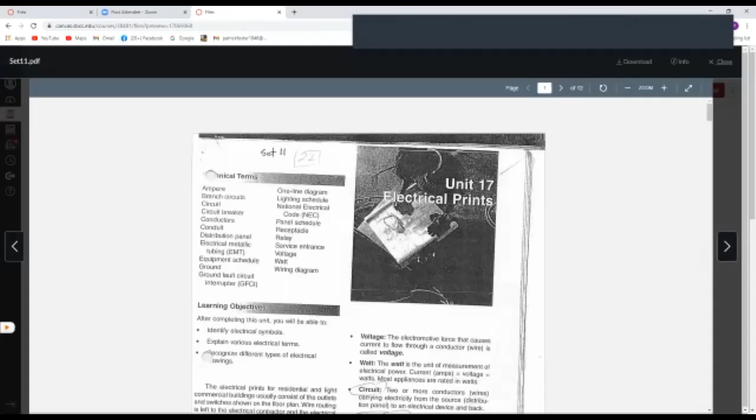This book that I'm taking these from likes to give everybody a little terminology, but you don't really need to know this that much if you're a carpenter, because if you're doing your own electrical... some contractors - let me put it this way - a contractor by law is able to do electrical and plumbing in their project if it's a residential project. Like Jim Cunningham, one of the other teachers, he does his own electrical and plumbing. So in that case, if you were a building contractor, you might want to know this stuff a little more than just a carpenter working for a company. But...

Electricity has a couple of terms in terms of its power. So you've probably heard of amperes and certain amp fuses. They use metaphors for electricity from water. So here you have the measurement of the current. Current's a term for water, right? You have a current running down a stream or in the ocean. So when they started understanding electricity, they had to find some kind of metaphor that would give people a picture of what was going on. The truth is there's no real good picture. It's kind of a mysterious phenomenon, but they've settled on current and water terms to help people.

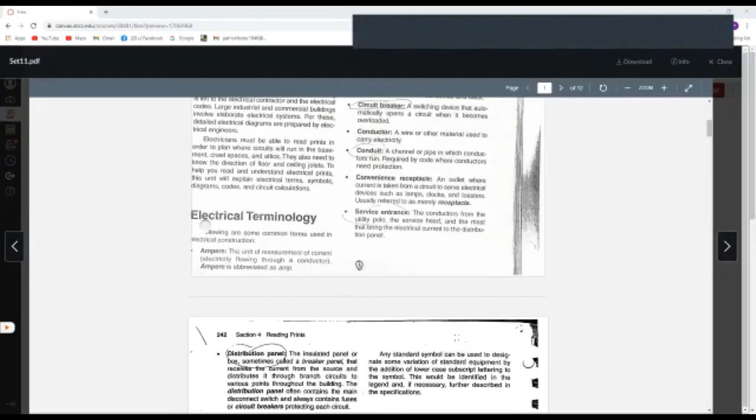Service entrance is where the utility from the power station nearest you comes down the utility poles to your house. Where it attaches to your house is called a service entrance. There's a service head, that little bent pipe that accepts it, and that brings it down to a distribution panel. We'll look at a picture of all that in a second.

Yes, question - a little bit blurry, just to let you know. Oh really? This second page is blurry too? It's a little clearer, but it's still slightly blurry. Huh, there you go. I mean it's pretty good, you can read it.

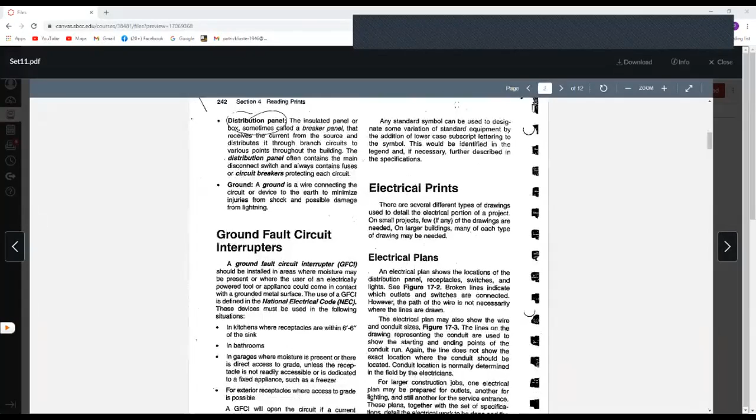Okay, okay. I'm not sure I can do anything about it, so I hope... that one's legible.

Okay, so for building, I'll name the things that are really useful for non-electricians to know. Ground fault circuit interrupters are a special type of outlet used where there's water. Bathrooms on the drain boards have to have them, kitchens on the countertops have to have them, anywhere water is likely to be splashed.

Here it tells where they're used mostly. If there's some kind of fault in the current, like if water gets in there, it provides a place for the current to go, not in its regular circuit, and that could be going toward you. You could short circuit that yourself with your finger if there was water nearby.

So when it starts to short circuit, it sends a message to its interrupter and it shuts off in 25 to 30 milliseconds. That's pretty fast, fast enough to keep you from getting electrocuted. It's really nice to have these in your kitchen, so if water gets splashed on it while you're toasting your bread, you won't get electrocuted. That's a great invention.

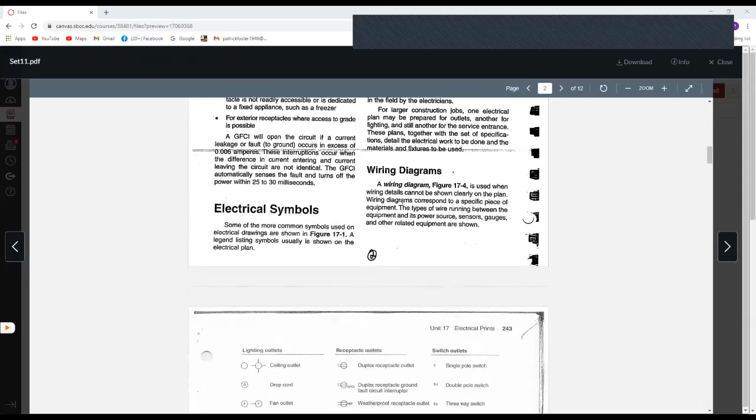Now if you short circuit a circuit in your kitchen countertop where the blender or toaster is, if you didn't have a ground fault circuit interrupter but a regular outlet and you splashed water on that, it would shut off at the panel. That particular circuit would shut off at the service panel, but it would take a lot longer to do that, so in that time you might get hurt. So they've put these circuit breakers not where all the circuits are in your panel, but in the actual place where they're being used, where water is.

Okay, now electrical symbols we'll look at in a second. There's a whole page of them.

So, electrical prints — we're talking about blueprints since that's what this class is about. There are several different types of drawings used to detail the electrical portion of a project. On small projects, few, if any, of the drawings are needed. Typically you'll just have stuff on your floor plan if it's a simple house.

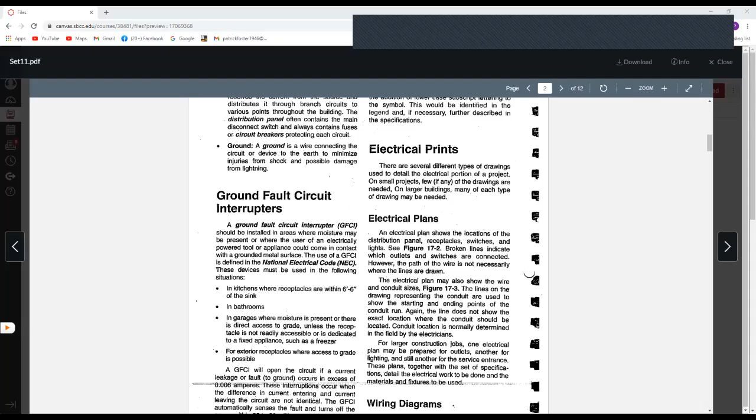If you're a wealthy person with a lot of strange electrical devices that are complicated and draw different kinds of electricity, you might need a separate plan. But in most middle class houses, there's not much more than a floor plan, and we'll show you that in a second.

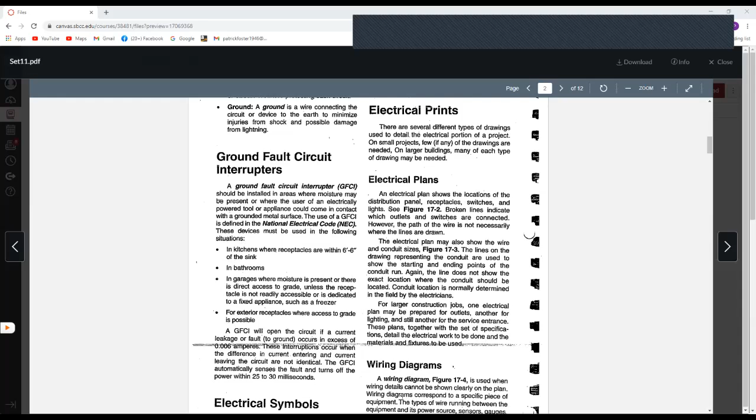So the main thing an electrical plan would show is the distribution panel — that's the box in your house where all the circuit breakers are listed. Receptacles, which are outlets; switches, which turn the outlets on; and light fixtures, sometimes fastened to the ceiling or wall.

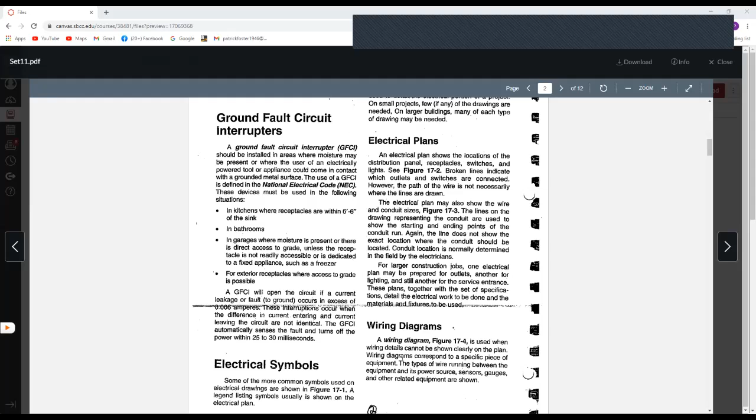And then they have broken lines that show how the switches are connected to the outlets and the lights. Those are the basics of an electrical plan, and you can get all of that on the floor plan — there's enough room, so unless it's super complicated, it'll just be the floor plan.

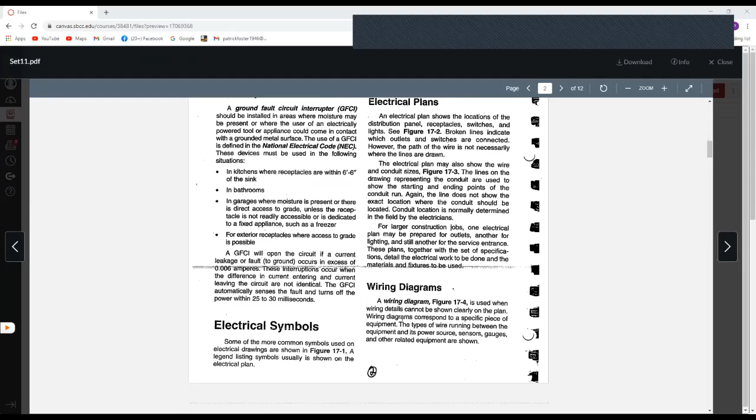Otherwise there might be an extra plan if there are complications. We'll look at the Laguna Blanca school blueprint later — they were redoing an arts building with lighting for drama and theater plus art studios, so there was a lot of lighting and outlets needed, and they had a special plan for it. But that's commercial or school construction.

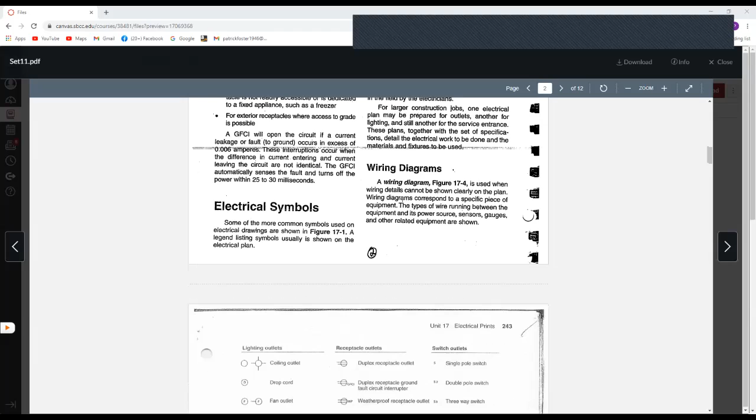Okay, so let's look at some of these wiring diagrams. They may do drawings if the wiring's complicated and you can't show it on a floor plan — there may be supplemental plans, so we'll look at some of those coming up.

So these are your basic symbols, and we'll look at how they're used on a floor plan in a second. Sometimes in the middle of the room — this is becoming less popular — they used to put a light in the center of a living room or dining room, and you could have a chandelier come down over your table, switched at whatever way you came into the room. But now they're doing a lot of things besides just that ceiling outlet.

There's a fan outlet symbol. Usually they have the letter that has to do with the symbol — F for fan, J for junction box.

Here's the lighting outlet. They call them outlets because you plug the fixture into the outlet, like you plug a device into a receptacle. The receptacles — duplex just means there's two, like you've seen in your house, one on top of the other, two outlet receptacles.

If it's a GFCI, like we just talked about, you have to write that next to it to distinguish it. If it's outside, it needs to be a weatherproof receptacle with a box to protect it from rain.

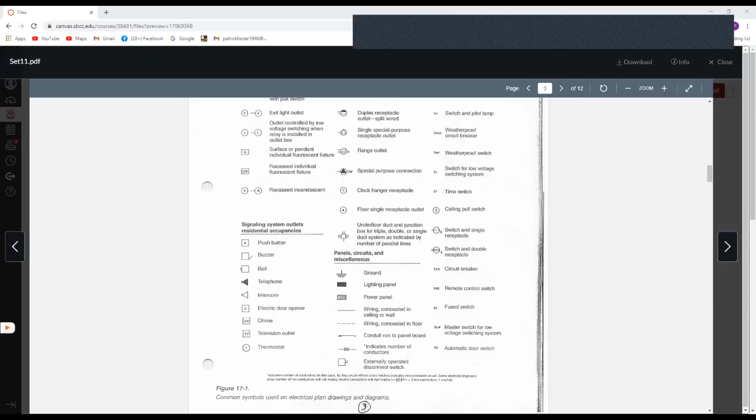This book that this came from was probably made 20, 30 years ago, and there's been a lot of new electrical gadgets, so there may be some differences and there may be new symbols for things.

Then there's switches, that's the third category. Single pole switch means there's just one switch in that little place. Sometimes there will be 2 switches above and below each other. A 3-way switch doesn't mean there's 3 switches on the switch itself, but it means there's another switch that operates with it. So if it's a room that you want to be able to shut things off from several directions, you would have a 3-way switch, or a 4-way would have 3 places to switch it off.

We'll look at those when we look at the floor plan. Those are the main ones, okay?

Now, I don't know why they have a television outlet. Well, maybe because it's dedicated outlet and they want a lot of power and they don't want anything else on it, so that may be why they put TV. But now TVs are getting more unique, so they may require other electrical demands. Although I got my first big screen TV a couple years ago, I was kind of late, and it required... you could just plug it right into a regular outlet. So I think they figured out how to make all these appliances pretty normal. I think that's for the coax cable, Patrick.

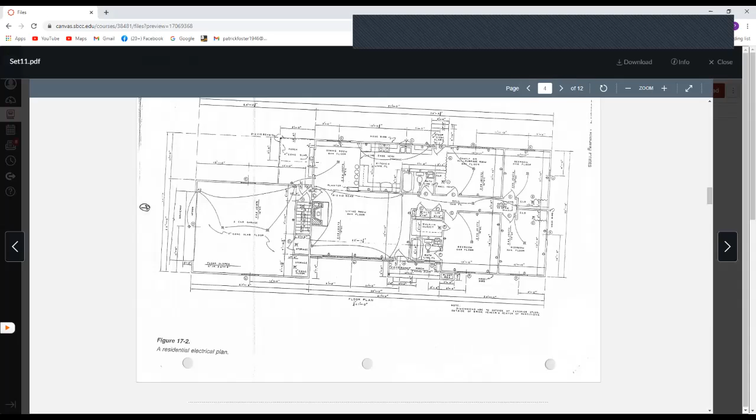Yeah, yeah. Is that big enough or more? Can you zoom in a little more, please? No, the plus stopped, it just stopped, I couldn't go anymore.

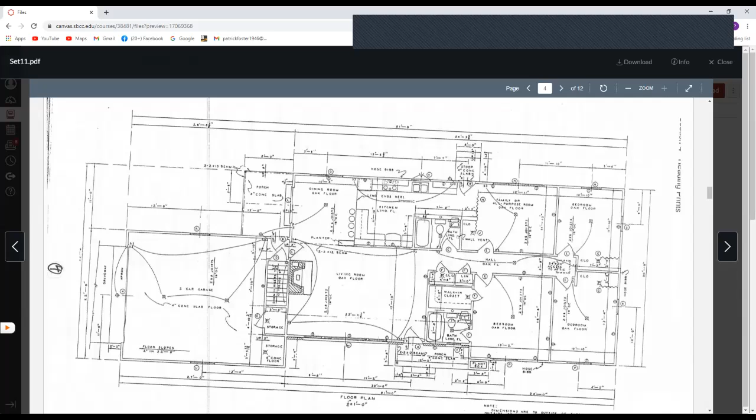So we've got some blueprints that we're going to look at that I think are clearer, and we'll look at this stuff again. But let's just show this.

There's something about this print—I had trouble with it too, and I read these things all the time. There's something not quite right about it, but anyway, let's find the front door. Where is that thing? Here's the garage. This must be the front door here. Yeah, here's a porch. So do you see where my arrow is?

Everybody? Yes. Okay, so you come in the door and your house is dark because you've been out to dinner and you shut the lights off. So here's the switch, you switch this and it switches on this outlet. This living room doesn't have a light in the middle of it. If you go up here for the all-purpose room and the dining room, they have lights on the ceiling. So sometimes the switch—here's a switch coming in from this.

You come into the living room and go into the dining room, and you can hit the dining room overhead light—the living room doesn't have one. So what they've done is switch one of these outlets, which probably has a table lamp on it. It shows this going to another switch by the dining room, so if you're coming from the kitchen wanting to go watch TV and have a drink in the living room and it's dark, you just walk over here and it's the same switch—it'll turn this light on.

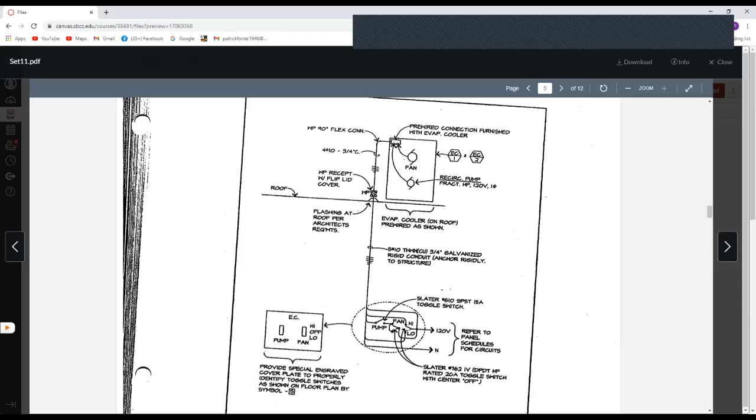So this is some kind of evaporative cooler, and it requires special wiring. They may do a whole page on this—it depends on whether they thought of it when designing the house or not. If the architect had it, he could put this on a detail page where other details are, with a whole page of electrical or HVAC details. Or if they asked the plumber to come up with one to put in the plans, it could just be a page stuck in there. So sometimes they need specialization there.

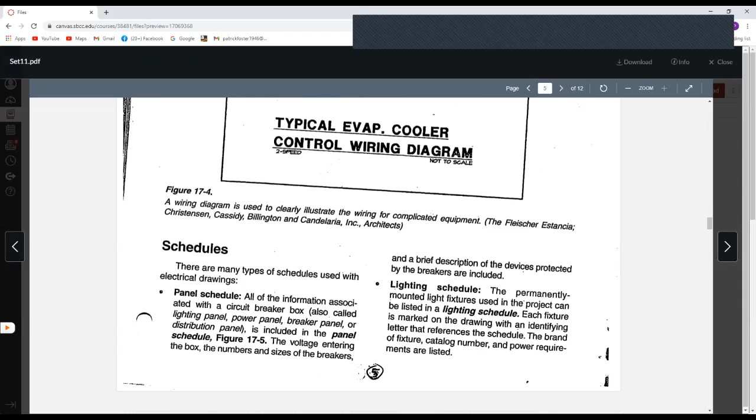So this is getting back—I might as well keep it zoomed up here so we can read it easier. These are all names for a circuit breaker box: a lighting panel, power panel, breaker panel, or distribution panel. Those are all alternate names.

It's basically—we'll show a picture of it—but you all have one in your house. It's just a big, about two foot across, two to two and a half foot high box with a bunch of circuit breakers in it. There used to be a box with fuses instead, the round fuses that you screw in. But every time a circuit overloaded and too much power went back to the fuse, the fuses were made so they had a little filament in them that would burn if the amperage was too high.

If you overloaded a circuit, it would burn the fuse out and you'd have to replace it. So you can imagine how tedious that was, and people would never have the right fuses on hand. They'd use them and forget to go get new ones.

So people would put pennies in the fuses. A penny will also span the circuit, the same place where the fuse breaks it. But what's wrong with just putting a penny where a fuse was? Fire hazard, yeah. The fuse's filament would break and shut off the current, but a penny would just keep heating up and allowing the current to go. So it basically bypassed it. It wasn't a safe thing.

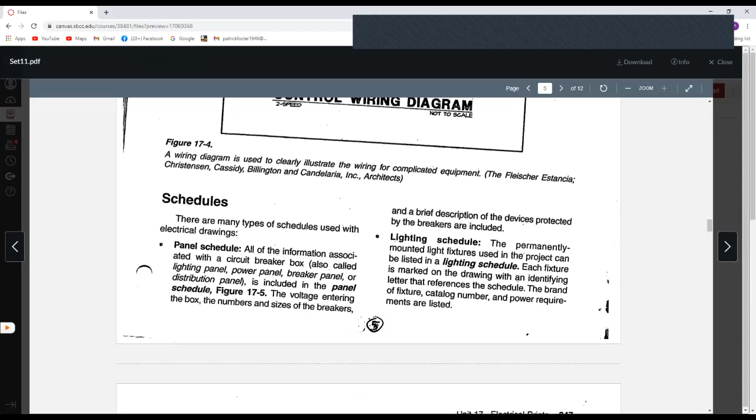Okay, lighting schedule. When you see the word 'schedule,' remember we talked about it in the beginning, that it's actually a list. Why they call it a schedule, I don't know, because schedule usually involves time, but this doesn't. This is just a list. So a lighting schedule is just like a door or window schedule. It lists all the fixtures, what they are, and if they take any extra power or anything like that.

There is one in here. So this is a sketch of a circuit breaker panel, a distribution panel. And what they do is look at this, you'll have rooms. Where are they?

Oh yeah, here we go. So living room, these are lighting and receptacles in the living room. That's this circuit. There's a second circuit for the garage and the kitchen, they're on one circuit. There's another circuit for the garage, which has hall lights. So they divide up all the needs of the house into circuits that go around and service the outlets and lights.

But the way they do it, partly it's convenience, so they'll take rooms that are next to each other, but it's also partly the amount of energy they need. So if you have a dryer, which takes a lot of energy when it starts up—washers used to take more energy than they do now—an electric range will take good energy too. Toasters take a lot of startup energy, even though they only go on for a minute.

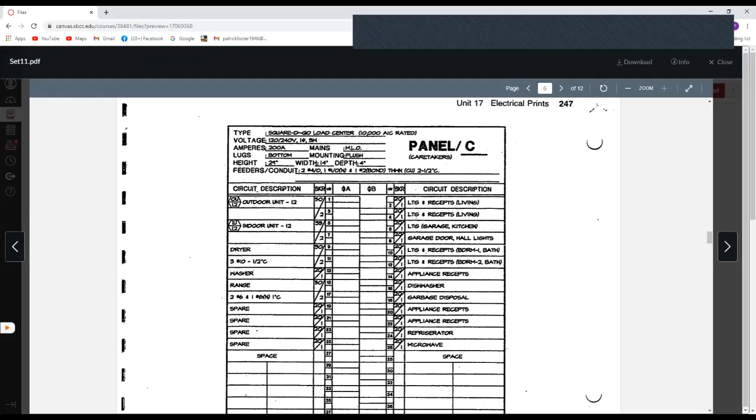Sometimes they'll put individual circuits, or they'll do a kitchen circuit with a couple of things like where a toaster or a microwave is going to be, and make those separate circuits so nothing competes. If you have a bunch of appliances on at the same time, it won't pop the circuit. So those are the kind of decisions that go into what's on the circuits, and where they are. See, what are these? Circuit descriptions.

Then they might have an equipment schedule, like a lighting schedule, but that's if you have equipment that has unusual power needs and wiring differences. Then they have a thing called a one-line diagram, which we'll look at in a second. It's just a way electrical circuits can be drawn.

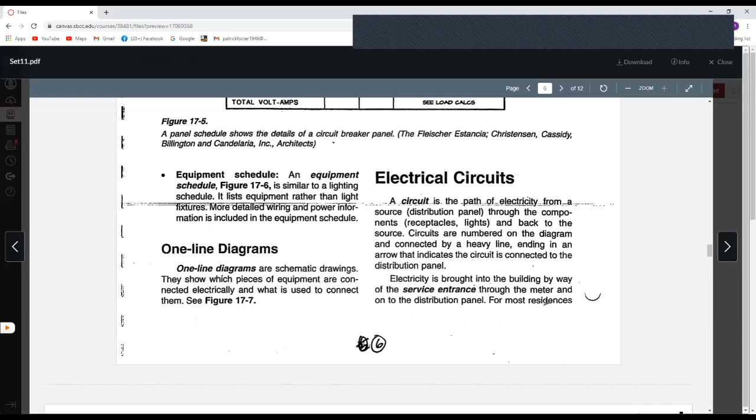Here again, it defines circuit as the path of electricity from a source. In most of our cases, it's from the utility company, unless we're running on solar, which more and more of us are. We may still have a panel to feed the electricity back into and use at night, or we may have batteries and be totally off the grid. So they go through the components, the outlets and the lights, and then they come back to the source.

So here's a one-line diagram, which means there's no depth to it. They don't draw thickness or depth of things, just lines that show the way electricity moves. I can't even tell you what this is of, what kind of building or room this is. Anyway, that's what they look like.

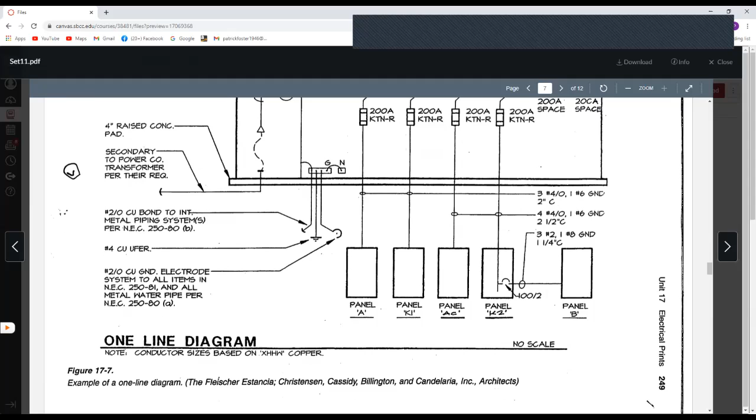And this is a section, right? Is it like a section or elevation? No, I think it's a plan. It says... even though I saw the 4-inch raised concrete pad, so yeah, that's a section, and these are vertical too because they're panels. But I think the wiring isn't necessarily oriented that way, they're just connecting devices with wires, so the orientation in the room isn't important. That's what one-line means. They can draw them different ways, whatever is easiest to identify. You don't want to draw a panel on its end because you'd have this little thin line, it would be stupid, but with everything else you can do that. Good question though.

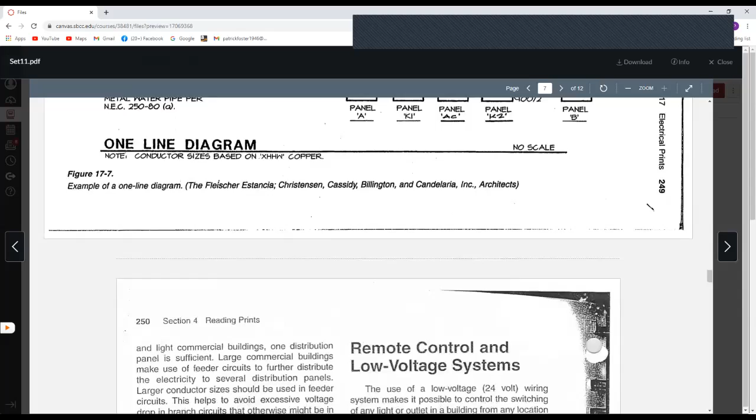Let's see. So here, branch circuits are the various circuits you have. General lighting circuits are used primarily for lighting and outlets servicing small things like clocks, radios, and TV sets. So your house will have circuits for these. Then they'll have kitchen appliances, which take more energy, so they'll have a different circuit, maybe several circuits. I think they want microwaves on a single designated circuit without sharing with other things.

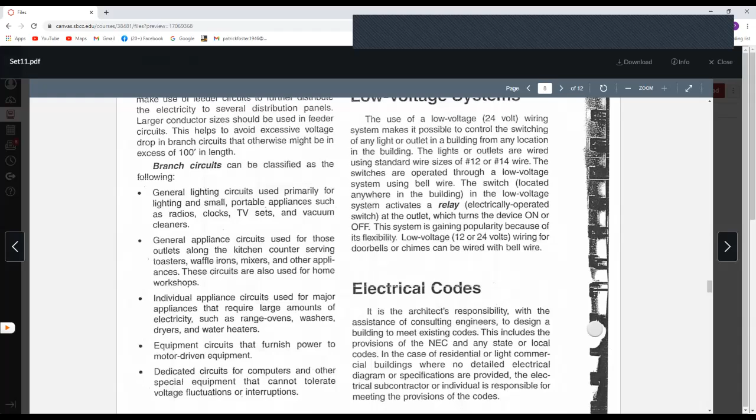But a lot of these like toasters and waffle irons and mixers can share a circuit. The thing is, they have to figure out how the average person is going to use the house. If you're wealthy and designing the house to the way you live, you could say you have parties in the morning, cooking waffles and serving toast and mixing drinks or smoothies, and they could all be on at the same time. So they'd say we'll need a couple of separate circuits so we don't overload it. But most of the time they figure people will use maybe a couple of these at most, so they'll load them up a little more densely on the circuit.

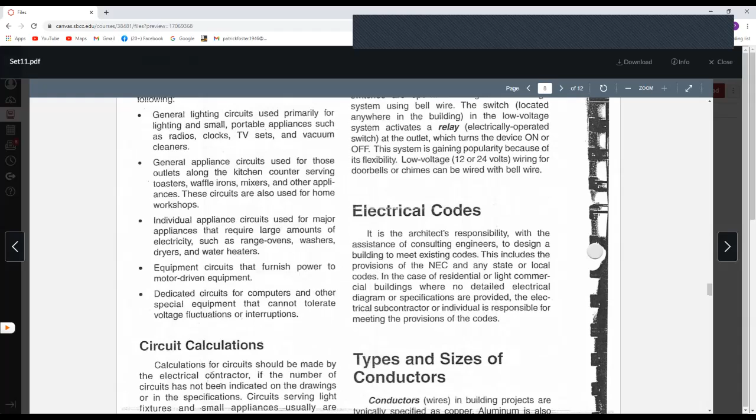Here's individual appliance circuits. So sometimes ovens, washers, even refrigerators have just their own single designated circuit.

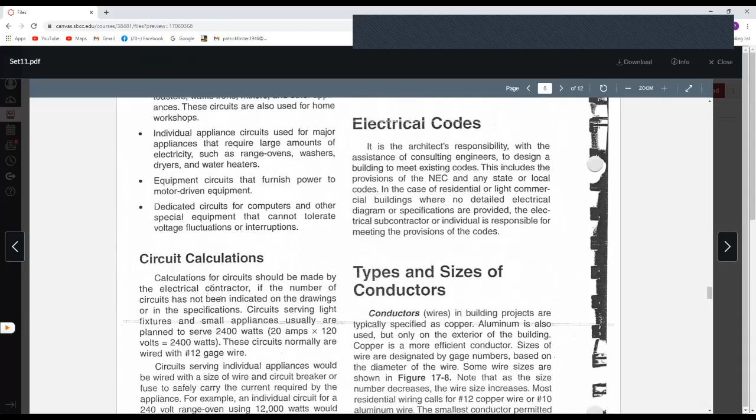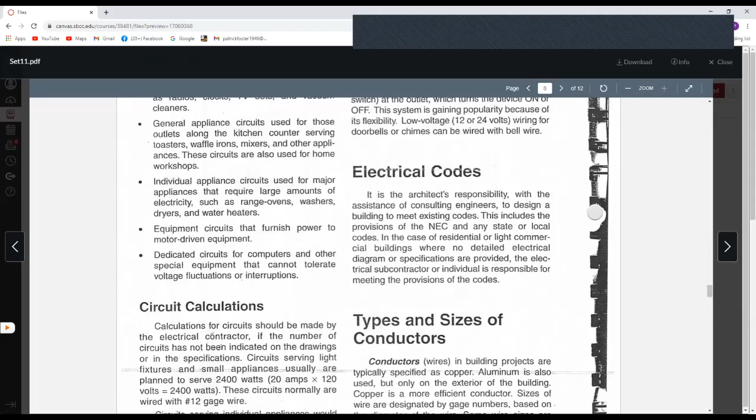Calculations, we don't have to look at that, electricians do all that. There's a national electric code. The architect and his designers, his engineers, have to make sure everything's going according to this national electric code. I'm not sure how strong it is. Somewhere I read that this was a suggestive code—it suggests you go along with this. But I think state and local codes are pretty fixed, they're going to be at least as strong as this national code, or stronger.

Okay, conductor wire sizes, we don't need to know too much about that. That page didn't have much. Here's another set of plans, this is from another book. That's a mess, isn't it?

So on a floor plan, we'll look at floor plans in a minute. They often don't connect the outlets to the switch. In other words, this shows all the circuits and labels them. Here's the first circuit, and then there's a circuit schedule. So circuit 1 has bedroom 1 and 2 on it. Say the power comes in at the switch here, then it goes to this outlet and to the overhead light, and it goes to these outlets, through the wall to this outlet, back to the light and back to this switch, or vice versa.

And then these switches have to be connected to the main panel some way. They don't show in the wall where these go, and usually they don't show the connection of the outlets. This is actually defining the circuit, so all the electrician has to do is make sure these are in the wall instead of out here. But this tells where they would go. Usually they just put the switch going to a light and going to an outlet if the switch powers that outlet. Otherwise the outlets are just freestanding with no connection, and the electrician comes in and knows how to do this.

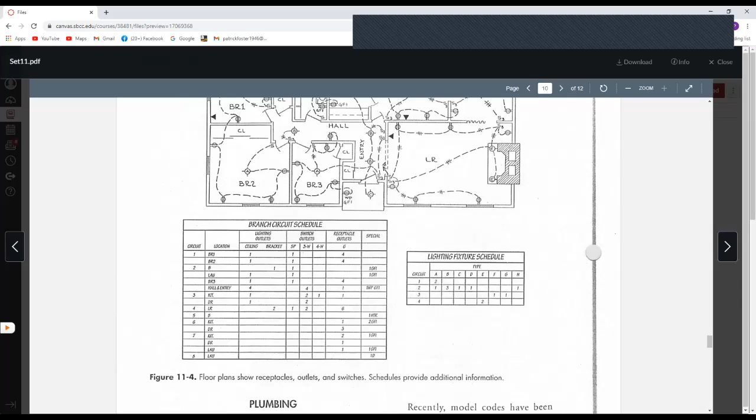They don't fill out the schedule more, but that's what it would look like. And then you'd explain what each of them are - A would be this type of lamp, B would be this type of lamp, etc.

Patrick, I got a question. So for those two bedrooms, there's a switch that controls - if you're walking in bedroom one and you flip that switch on, that's going to control all the outlets and the light?

If they had a part dark, like we saw in the symbol, if one side of the circle was filled in dark, that would mean the switch actually controls the outlet - made it live, and you could have a desk lamp there that would light up when you turn on the switch. But because they're all connected, that's one, like you have that on one breaker, for example.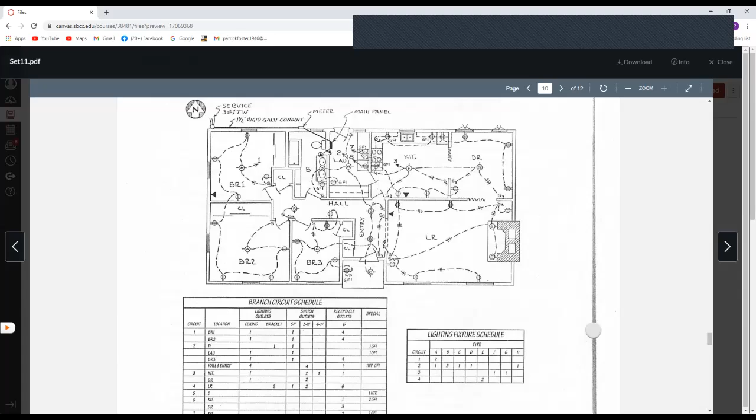Yes, it's probably - well, they say circuit one, so that would be a single breaker. Yeah, each of these eight circuits would be a breaker. Okay, that answers my question.

Yeah, so this shows you a little bit more. But like I said, the difference between this and the last one, and the floor plans we're going to look at, is usually they don't connect the outlets - they don't actually put the circuits themselves in.

And let the electrician figure it out, right? Yeah, they know what to do. They go right to it.

What they do want is to put the switch and light, because the client will look at the plans and say, okay, that's good, that's where I want it. Sometimes they'll put a switch on the wrong side of the door, and the client will say, hey, I can't turn this on because the door's in the way. So then they change it - part of it is information for the client to make sure it's the way they want it.

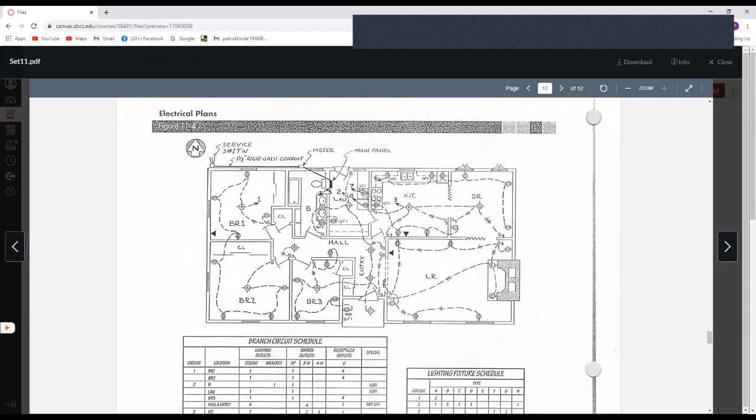So this is usually not here, the actual circuit connections, at least in my experience. Maybe some people do it. So let's see, anything else?

Oh yeah, okay, so here's - I don't know what kind of drawing this is. It's probably computer generated, because no one in the right mind would try to draw this freehand. Look at it, I mean, it's a mess.

But this shows the circuits also. Here's where they come into the house, and then it goes here, and one circuit goes to here, and then electricity goes this way - this must be a porch light or something - goes over through a joist system in that ceiling or floor of the next room, goes to here.

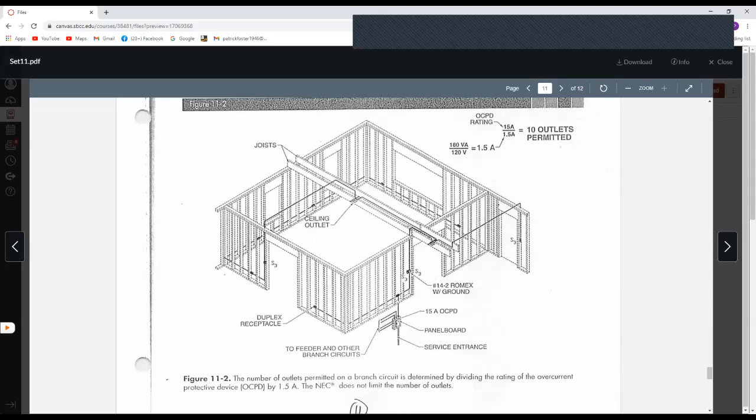Oh yeah, it goes over to here, and also goes across the house this way, and comes down and around and over to there and there to there to there. So that just shows you how they all connect, and here's a formula for how many outlets you can have, but this class is not learning how to design how many outlets you can put in.

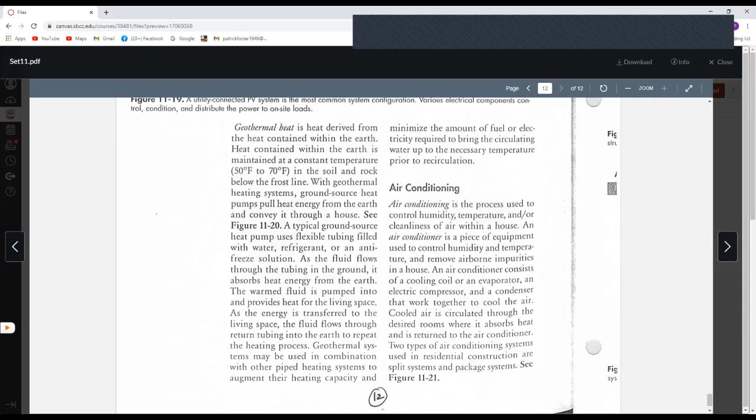So the geothermal hasn't taken off. It's mostly in the country where people have a lot of land around their homes. But it's a great thing because if you guys know what heat pumps are... No. Well, it's like air conditioning. Air conditioning, the kind we have now, it draws heat.

It draws heat from the air, and that heat they use, or it'll draw cool from the air, either one. They run them as both heaters and air conditioners. Instead of heating up something with electricity or gas, they take the heat that's in the air. If it's a warm day, they can take that heat and reverse it to get cold from it for air conditioning, or vice versa in the winter for heating.

So heat pumps work off the heat pumps you can buy at Home Depot, they work off the air. They're air drawn heat pumps. The difference in the air outside and what you want inside, seasonally, they can capture that difference in heat, which is really ingenious. It took physics a long time to get to that point, but it's a really great system.

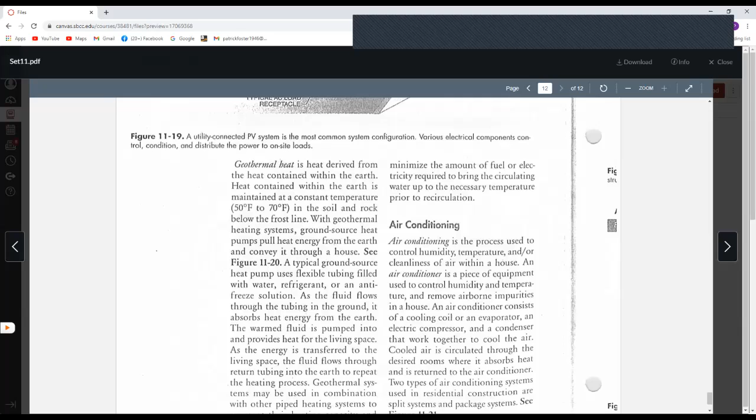The geothermal heat pumps go into the ground because under 5 feet, the ground's between 50 and 70 degrees all year round. 50 degrees is a height - if you're in a 50-degree house, it's cool, you're a little chilly, but you're not gonna freeze to death, because it's got to go down to 40 and 30 to freeze. But the amount of heat you can get from 50 or 60 degrees is incredible. So these pipes go down into the ground and retrieve that heat and use it for heating.

So we've got a lot of geothermal. Let's see, I guess I don't have a picture. This is the end of the road on this one. Somewhere else I'll have a picture.

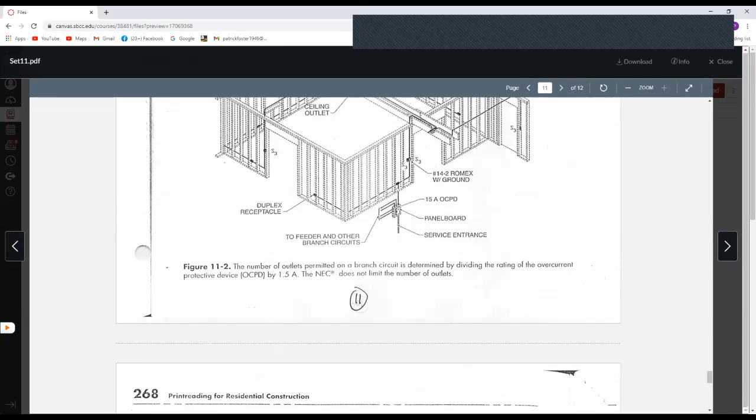So, God, how did an hour go by? Time flies. So, do you want to take a break or do you want to try to get through this?

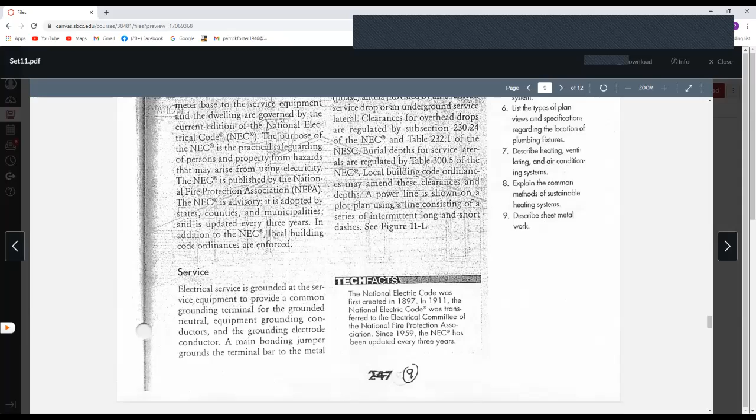You can also read this on your own if you're interested. You may have an interest in these particular trades.

Yeah, I mean it tells what stage. This is good for a carpenter to know because you have to work around the plumber. They didn't mention it in the electrical chapter, which is also from the same book. It's funny, but you have to work with them because they're drilling holes in your studs, so they can't do it after you put the sheetrock up. So you've got to figure out a timing, so you don't have the sheetrockers come in until the plumbers and the electricians are done filling up your walls with their stuff.

Also, they will often damage some of your structural integrity because they don't know. Sometimes they'll drill in the wrong places, or this or that, so you have to kind of work together to make sure the house stays where it needs to be.

So they have a rough in, and that's just, obviously, the utilities have to be brought to the house, to the site. And if you're going to do a slab, you have to have them come up through the slab where they're going to be coming up through walls. So you might have gas lines - well, not for much longer - but gas lines, water lines, drain lines, and electrical lines. If they're underground, a lot of electrical's from poles. So that has to come in, then they pour the slab around that, over that. And then all that work's got to be done ahead of time. And then after that, you come in when the walls are up and you can finish putting your plumbing pipes to where they need to go.

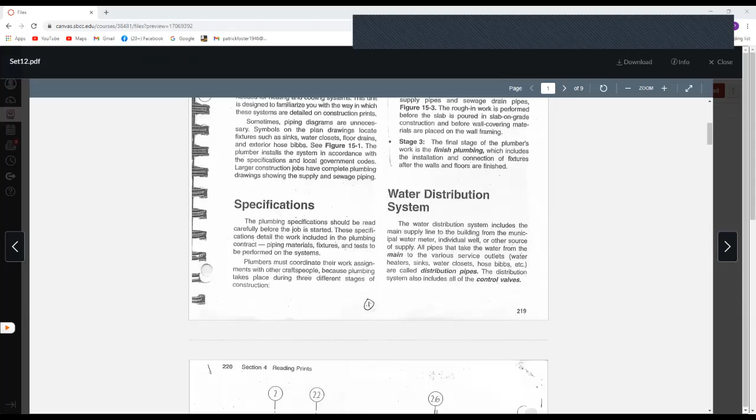Let's see what this says. So here's a floor plan. This is a commercial floor plan, as you can tell from all these bathrooms. And in the plumbing floor plans, it's the same as the electrical - they don't put where the pipes and the walls go, or where you're going to have a main plumbing pipe that's going to branch off. They don't do that on the floor plan, they just put the fixtures, the toilets, the sinks, etc.

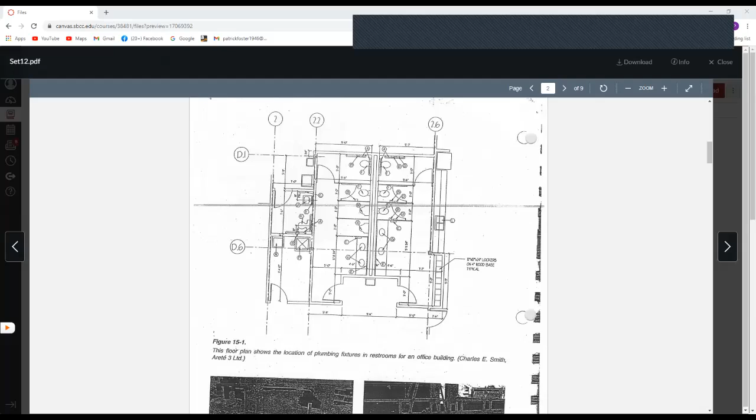And these pictures you can't see, so we don't have to cover them. Then the other thing with plumbing, one of the things is the materials of the pipes, what the pipes are made out of.

Copper's been the water distribution pipe of choice because it's easy to work with. You can sweat the joints, and it stays real clean, and the water flows through it pretty well. But we're running out of copper, and we use copper for electronics quite a bit still, right? It's the best conductor for electricity, so we use it in solid state and computer stuff, as well as all the Romex and most of the electrical lines, copper.

So it's kind of good that we started PEX, which is a plastic pipe for plumbing. It's a plastic pipe that isn't toxic. So we had to come up with polyethylene, which is the least toxic of the plastic pipes, and it's fine to drink water from it, and it bends.

PEX is more flexible than most plumbing pipes, so it's really starting to take over copper. Copper is also becoming more expensive as it gets more scarce, so people still like to use it - it's been the piping of choice over the years, but I think it's probably slowly on its way out. They used to use steel pipe, galvanized so it wouldn't rust. In old houses you'll see some of that, but it's not used a lot anymore, maybe commercially - I don't know a lot about commercial plumbing.

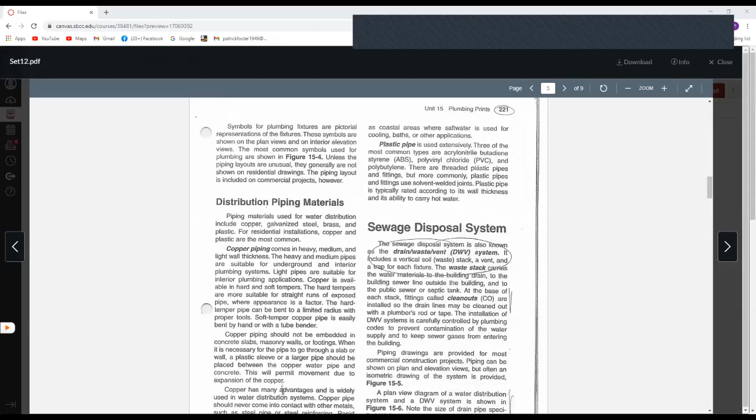Neither ABS nor PVC are allowable for water distribution now because they slough off toxins, and they don't want people drinking out of those. So you cannot use those for supply, but you can use them for drain because who cares what the drain water has. You can use PEX plastic pipe, and there's possibly polybutylene - one white plastic pipe that's still okay to use, but it's not PVC for sure, and it's not ABS. But people just start using PEX or stay with copper.

The drain system is sometimes called DWV - drain, waste, vent - because the drains drain waste and also need a vent as part of the system. So we'll look at that. You can call it a disposal system or a DWV system - that's kind of the traditional term.

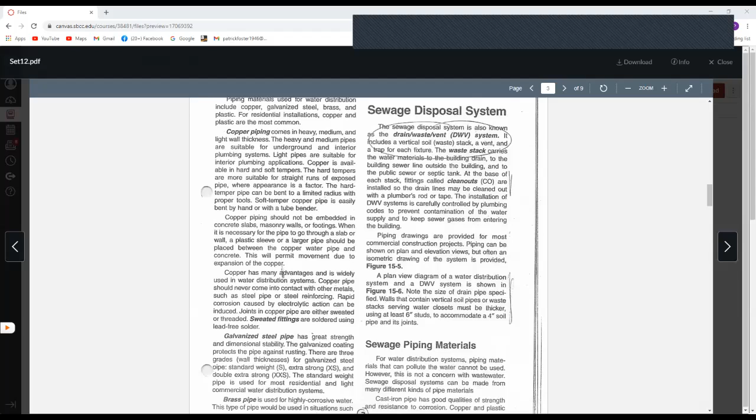In the plumbing system you need cleanouts, and probably you've never seen those unless you're involved with plumbing. They're little Ys that come off plumbing systems where you can stick a snake in and get to some areas. But people cover those up - I've seen them in apartment buildings covered up with sheetrock or in a place you can't get to. So in America, buildings are often torn down before things get so bad that you'd need to use a cleanout. But they're required - we'll look at where they go, and look at a diagram of where they're going to be.

One more thing before we move on - the drain pipes in a bathroom. You've got solid waste going down those pipes and a lot of sink and bathtub waste, so they have to be big, especially for the solid waste. You can't do a 2x4 wall behind a toilet - it's not thick enough. You could use two 2x4 walls, but not a single piece, because the pipes are often 4 inches, and a 2x4 is only 3.5 inches, so it's not even big enough. A 2x6 is 5.5 inches, leaving 3/4 inch on each side which allows for joints and stuff - so you usually have to have a 2x6 wall behind a toilet.

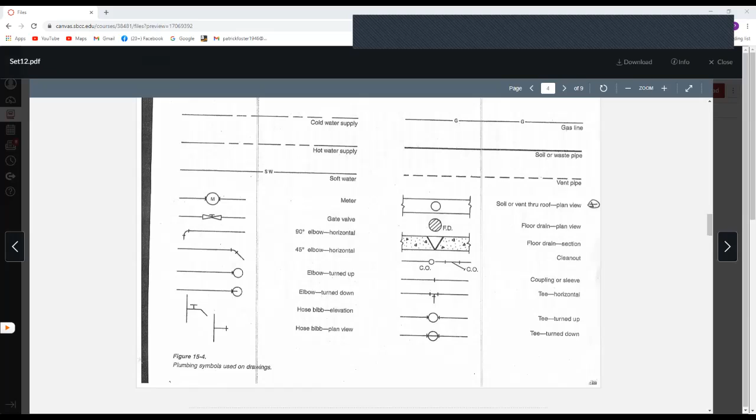These are symbols, but I won't hold you on any of these because we don't really use them that much.

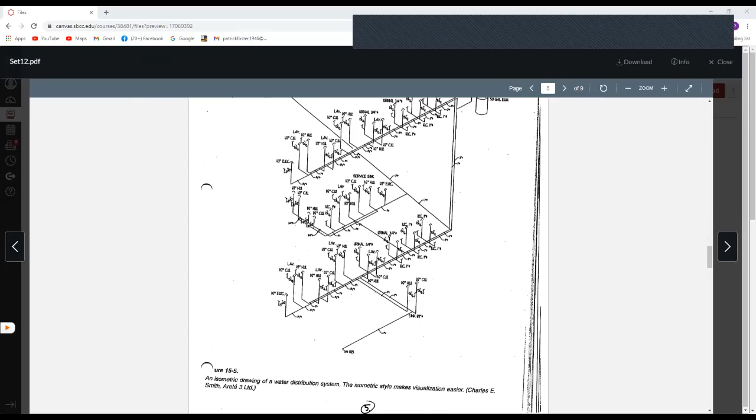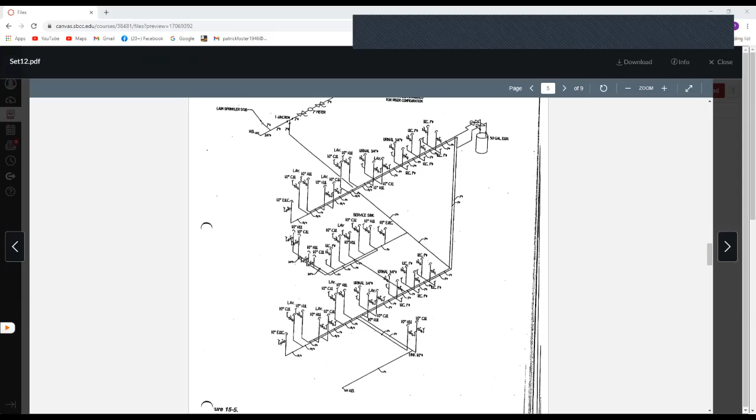This is a type of drawing, almost always for a commercial building where they have a bunch of sinks, toilets, and urinals lined up. It's called isometric because it's at that 30-60 degree angle and vertical, and it helps you visualize where they're arranged with each other. I don't find it that easy, though it's easier than some other types of drawings. The alternative is maybe a plan view from above, which would really be hell with multiple stories - a plan view is kind of useless. And an elevation would be useless because everything would be behind everything else. So where things are lined up together, you kind of have to have this kind of drawing to show where they fall. But again, as a carpenter, you won't need to use this kind of drawing - just the plumbers would use them.

And then here's some pictures of plumbing systems - they show a hot water tank, and the piping that goes to the various uses of hot water.

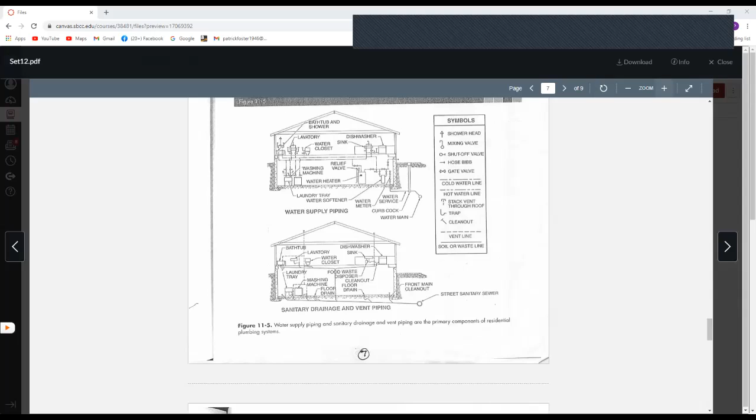It'll have the drain from the bathtub. Notice the little curve underneath all these fixtures. That's a trap, right?

Some of you heard the name trap, like a P-trap, or there are different kinds of traps. But every fixture that drains something has to have one of those.

Does anybody know why? To catch heavier things, or to keep sewer gas from coming up. Well, that first answer, to catch things, isn't its intended use, but it's turned out to be one of its uses. If your wife drops her diamond ring down there, often it'll settle in there and you can just take it apart and get it.

So that's true, but it's intended to keep the gas from rising. All these pipes are slanted down so the water drains, and the gas comes up on the same slant. When it gets here it'll go laterally, and there's usually water in this trap because as water pushes itself through until it gets to the end, a little bit sits in that trap. That little bit of water keeps the gas from coming up into your sink and into your bathroom or kitchen.

And if you didn't have that trap, you'd know the smell. You'd get a sewer smell all the time. So these traps are mandatory.

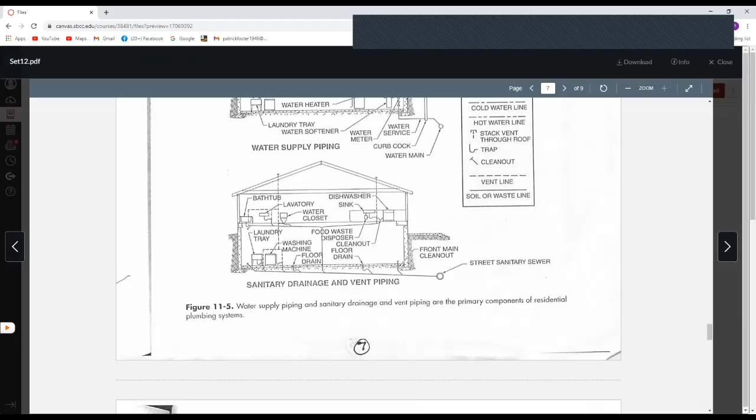Everything connects from one story to the next. It goes down to what's called a lateral in your yard, then connects to the street sewer system. Sometimes this pipe is clay, sometimes steel. Sometimes tree roots get down and break this pipe, so you might have to have some excavation and have a person come in and replace that. That happens occasionally.

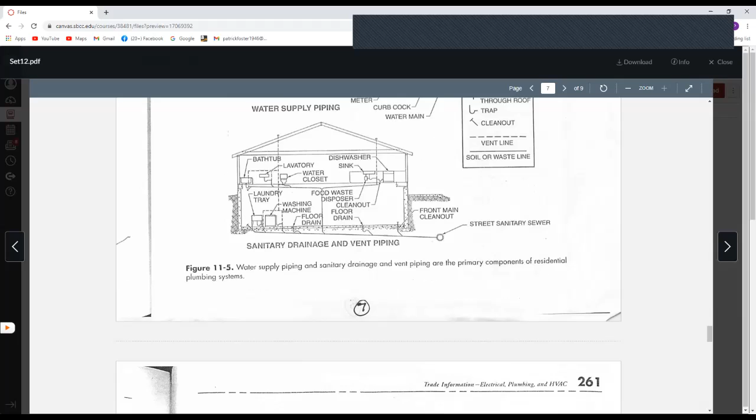But usually houses are pretty simple. They don't need to do that.

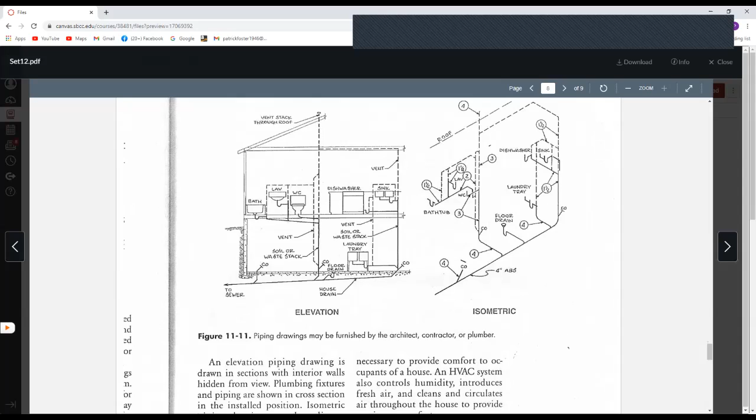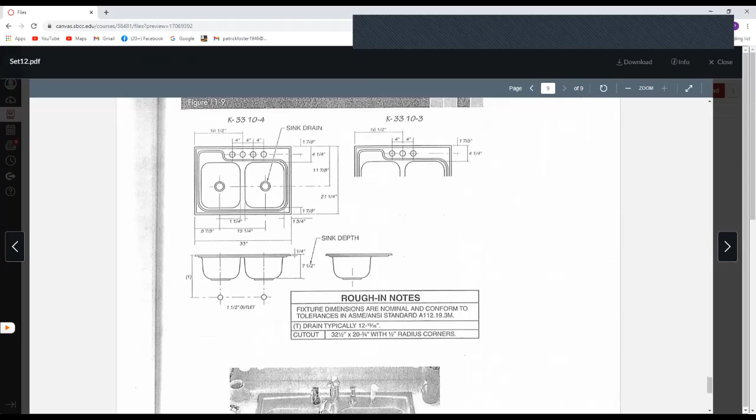Also, if you're putting in a granite countertop, the granite people would need to know this too, because they have to make holes for your fixtures. Okay, well, that was easy.

I'll show you a PEX system when I get a picture of one. Have any of you worked with that? No, I don't think so.

Okay, great. They're red and blue plastic, very flexible, and they come off of what's it called... they're all put together like a manifold. They come in a roll, but they're put together in a manifold, and it's really an ingenious system. I think it's the wave of the future because with copper you have to sweat elbows to make turns.

So it's a lot of work, and copper can leak. With PEX, it just bends, so you can bend everything and eliminate all that work. It's really a great system. You need a few special tools to work with it. Maybe I'll get those, but the reason I don't have them is it's not really a blueprint issue, but some of you might be interested in it.

Let's see, what time is it? Oh, we got a little time. Let's see what the HVAC says.

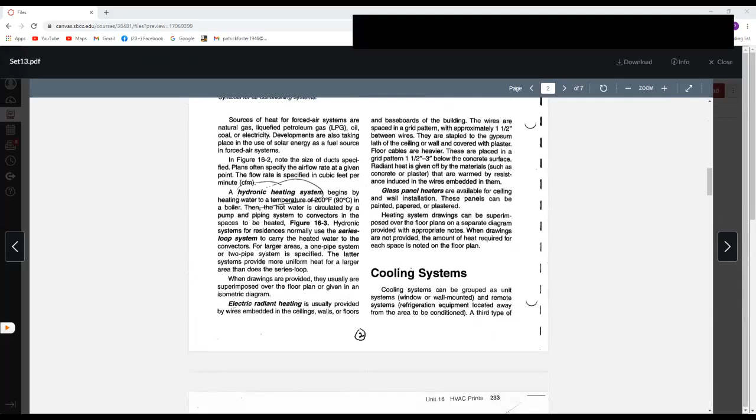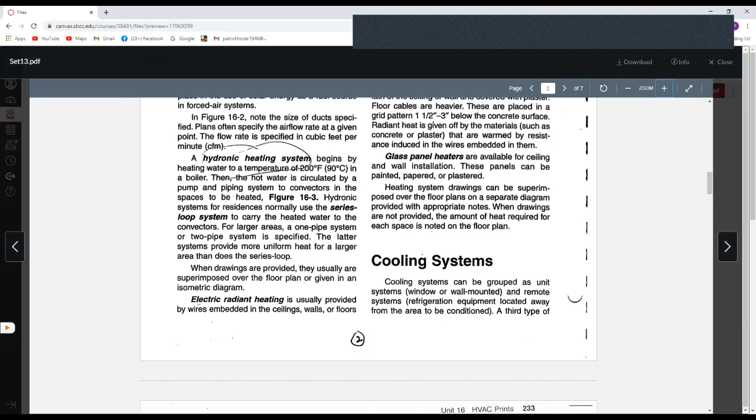So here's, do you see the middle here, hydronic heating system? Yeah, so that's what we're talking about. Like in Maine, I had one house I lived in that I remodeled, but it had a boiler in the basement, and that boiler I would connect copper pipe to, and run those copper pipes along the bottom of each wall on the room side. They have these covers so you can't see the pipe, and it's got fins in it, and then it's got this nice cover, and it goes all around the baseboards in your rooms, and just radiates the heat from the hot water. So it's radiant heat, which is nicer than convective heat, and it's real simple. It's a great thing. We just don't do it here, it's not cold enough. They may do it up Northern California or up the coast, I don't know. But that's what that is, hydronic. And then of course they have electric radiant heating that they put under the floors and things, but then that's no longer a plumbing issue, unless they use hot water, but now they're just using wires, I think.

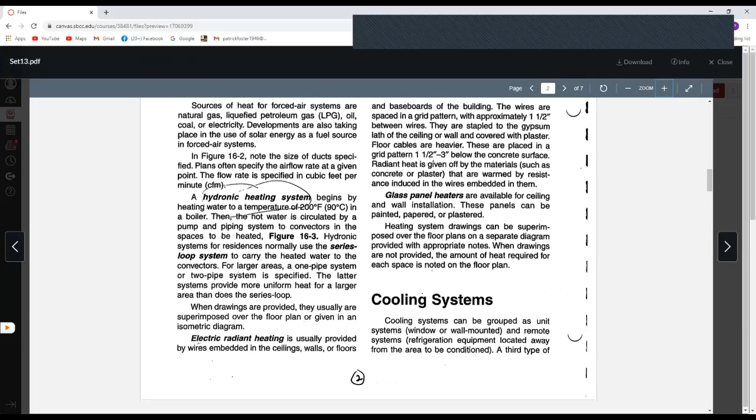Anybody seen... yeah, here it says, they can use wires, or they did use pipes of water under the floor.

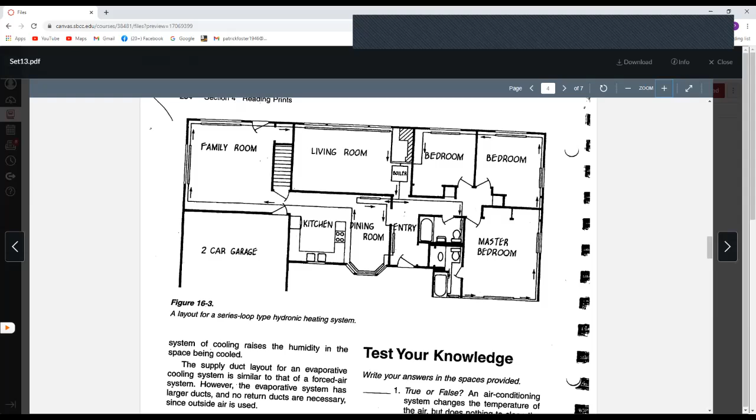Let's go down to, oh here's the radiant heating, a layout for a series loop hydronic heating system. So I don't know where the boiler... oh, here's the boiler. So the boiler just pumps it, and it goes along all the baseboards in the house. Kitchen, you don't need it, it just goes down the center of the room, and then along the edge of the inside of the wall. You've got to go through the walls, and it goes this way and back to the boiler. So this has like two systems, it goes through the bathrooms, through the bedroom, and back to the boiler. So this has two halves. Air filters, so that's about it, there's not a lot. Let's see, what do we got here?

Oh yeah, so we don't use solar collecting panels on the roof and windows so much, but it's kind of coming back. You can heat just air, just like you heat hot water in a solar hot water collector. You can actually heat air and use it for hot air, and if you wanted to get it everywhere, it'd have to be a forced air system with ducts. But you don't just need a furnace to do that, you can do it from solar collectors.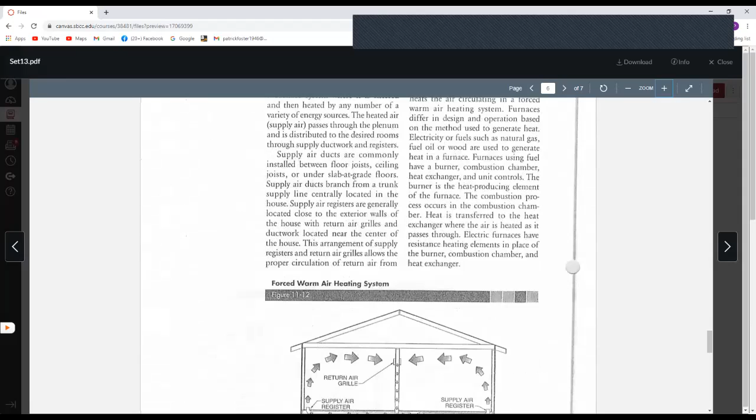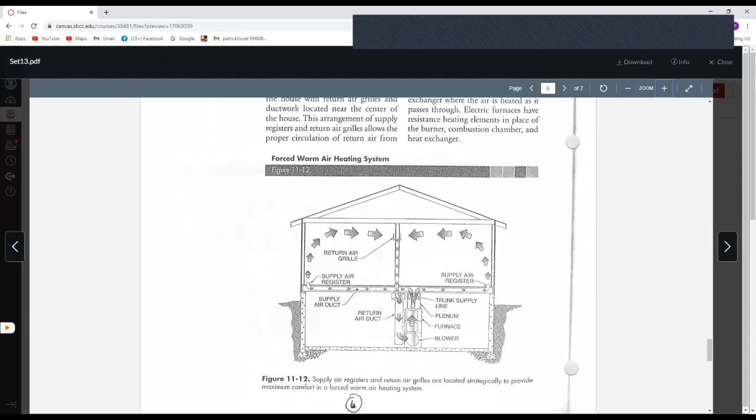Yeah, this is forced air. It comes in at the bottom, the hot air rises, goes into a duct, goes back to the heater, the furnace gets heated up and blown back through. That's how a lot of our forced air units work. I have one in my house and I use it once a year, it's so uncold in Santa Barbara, I hardly ever need it.

You don't want that kind of toxic fluid, the antifreeze fluid, in your system. If it's just heating, it won't matter. But if they heated a hot water tank where you're going to use the water to drink or bathe, then you'd need an exchange system.

Okay, so we're just about done. Let me show you - let's see, where am I? I'm just going to pull up a few plans in the few minutes we have left. Some of our plans - maybe I'll do our house, our kind of school plan. Get rid of that and see. The problem is I don't know what the floor plan is. Is it 4?

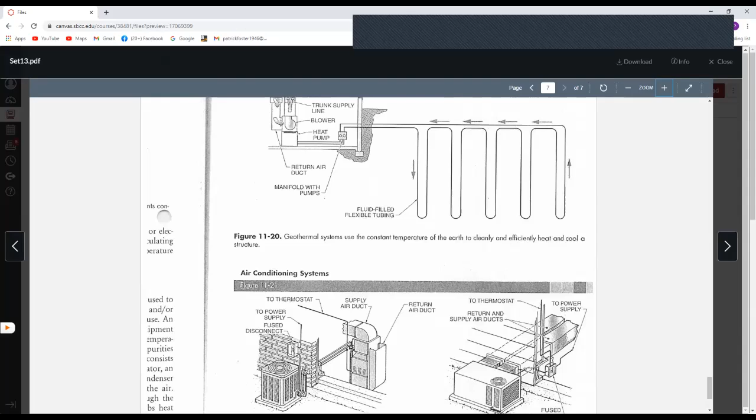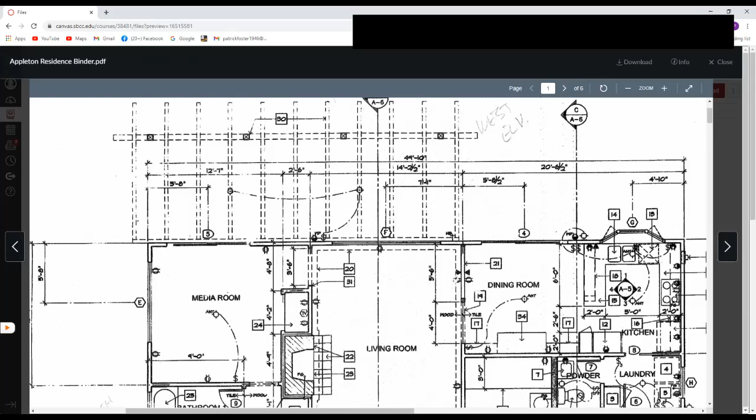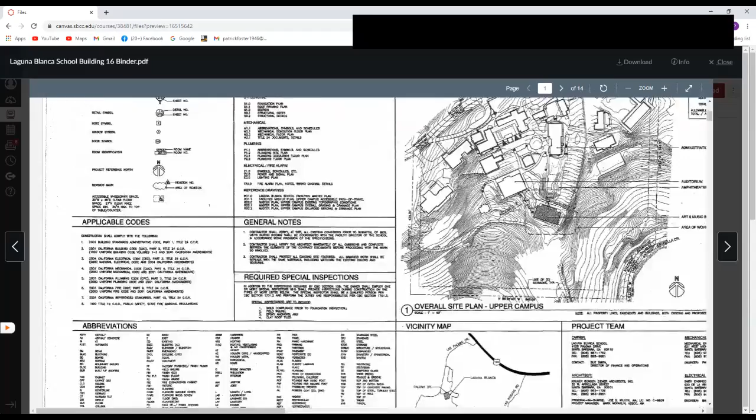Okay, let's go to - can you still see this screen? It's loading, yeah, but you can still see it, right? Okay, here's a commercial plan. It's got a new floor plan, which doesn't really show any electrical on this, mainly because this is a studio art building, and so there's a lot of systems.

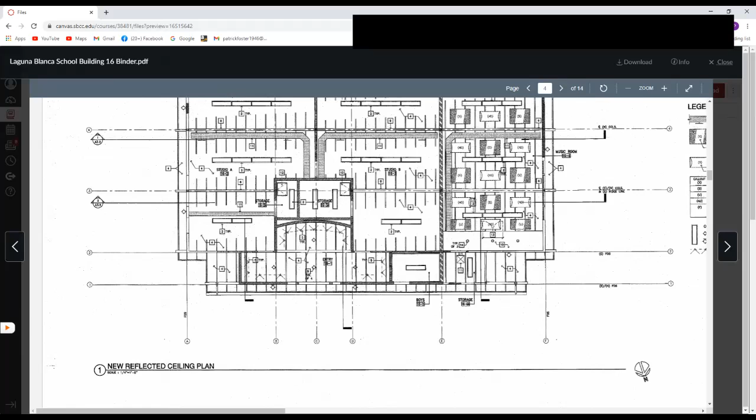So here's a reflected ceiling. This has outlets - you can see one there, or that's a light rather. There's a wall light there. So this has lights, and commercial plumbing plans have to be ADA approved in public buildings, and this is a school. So they have to show elevations and heights of all the fixtures - the toilet heights for wheelchair use, and sink heights and stuff.

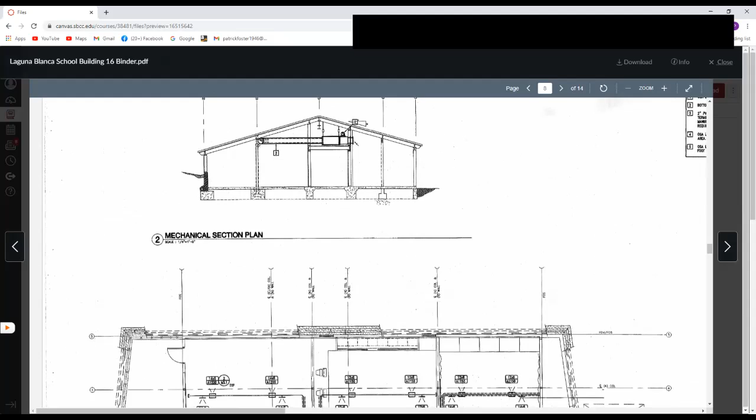So you do get those extra kinds of plans in public buildings, commercial public buildings. It's funny, this has one little mechanical section plan. So this has an HVAC system, and they're showing how it's stuck up there in the attic. This is mechanical, so this should be heating systems - looks like this is a furnace here, and the piping, ducting.

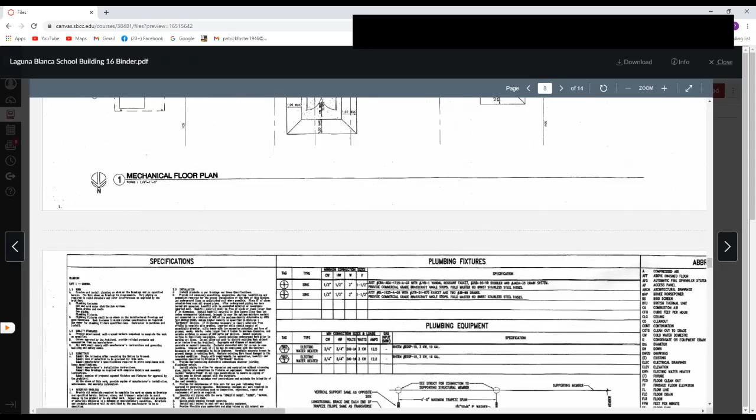They have some schedules here with plumbing fixtures and plumbing equipment. Specifications - commercial and public buildings are a lot more spelled out because they can't afford to have any problems, or everybody sues everybody else. So this has its own plumbing floor plan - they probably put in a couple of extra bathrooms. This was an existing building, so they're kind of converting it.

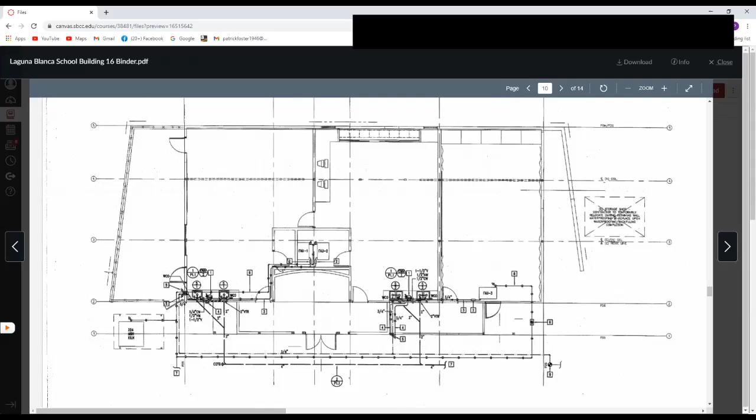So let's look close if we can see anything with this. No, it's not very clear, no matter how you look at it.

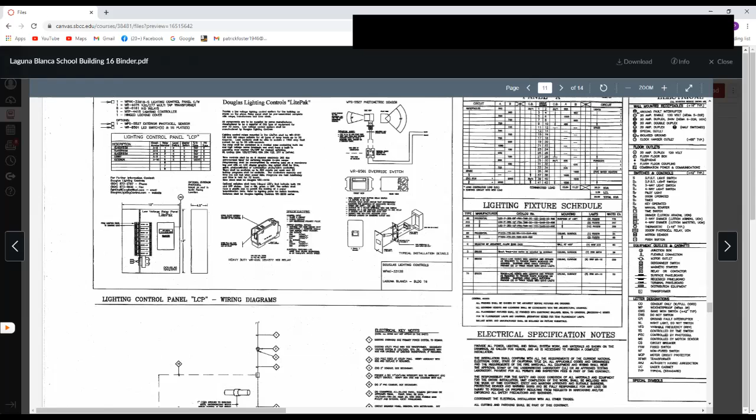Here's a circuit panel - remember we saw that panel schedule - and then here's a lighting fixture schedule, and here's some more schedules on outlets and switches. And then here's a wiring diagram. Remember where we said, this is a Douglas lighting control - it's a special kind of commercial unit they have, so they have to show how it's wired. Then here's a line diagram again, no depth, just spacing things out and showing how they connect.

There's a lot more in commercial buildings, especially this kind of building, because it is a studio, and so it's got all kinds of lighting and power and signal. Signal plans - I don't know, is that anybody's signal plan, like if they had internet connections? Not sure, I think signal may come under that. And then there's another lighting plan, so a lot of detailed work because these have very specific things - look at this indoor lighting schedule.

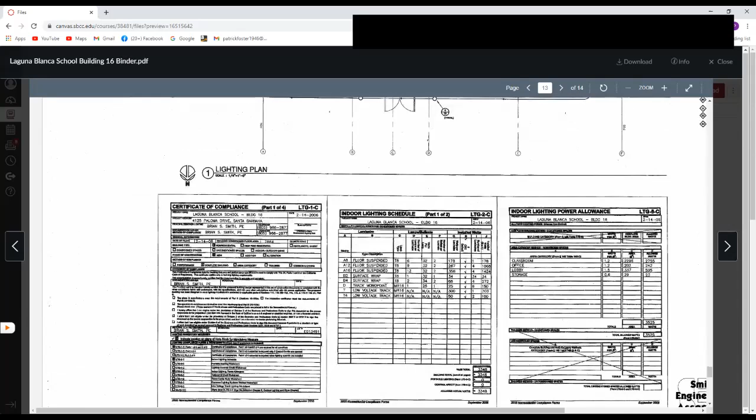Yeah, see, it's a whole nother world. I know, Marcos, you're the one that does more commercial work. A little bit. Depends on the signal stuff, that's more IT stuff.

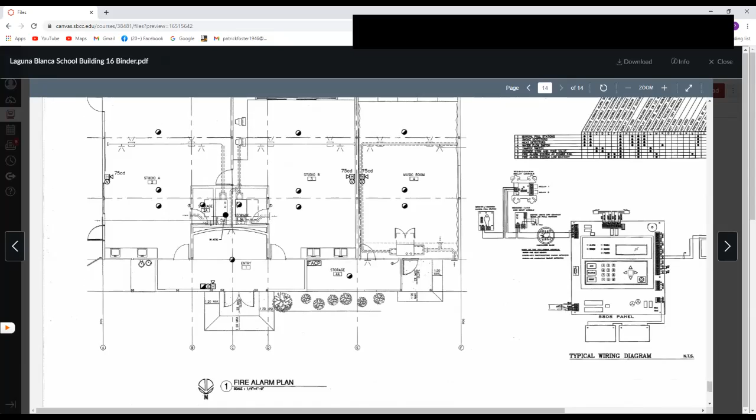Fire alarm plans for public buildings - they're really paranoid about fires hurting people, so they've got a whole plan for that. Here's another wiring diagram, part of the fire system. That's a lot of detail, huh? We do a lot of fire big time in the schools.

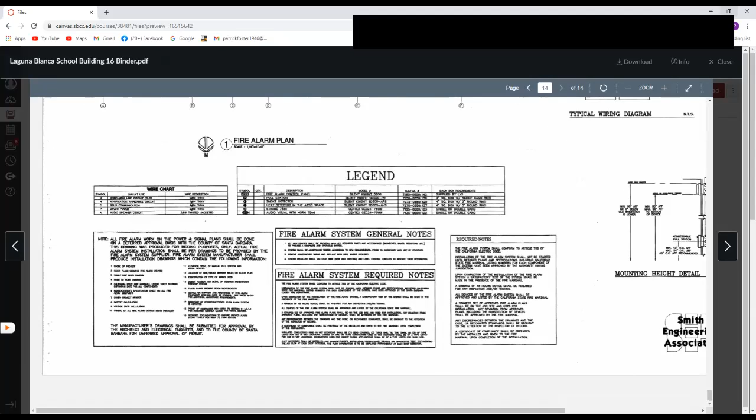So we're at 8:02. That's pretty good.

So again, when the final comes around, which is not that far away, 3-4 weeks, I'll prep you guys for it. We won't do a lot on those plans because we're not plumbers or electricians or HVAC people, we're builders. So it's good to get an overview, and then I'll tell you the few questions from each of those we'll have on the final.

What is the other stuff we learned this second half? Anybody remember? Second half of the class? Yeah, wow, well that's going to be interesting.

Electrical, plumbing, HVAC. So we have written specifications, we'll talk a little bit about that. I'll show you some commercial plans. I have a book that has some stuff on Wendy's that's kind of interesting. Remodel, I'm not going to show you much of that. I'm going to talk a little bit about things to watch out for that the plans don't cover. We did that estimation, some basic math, remember? So we'll go over that. And then using plans from construction prints.